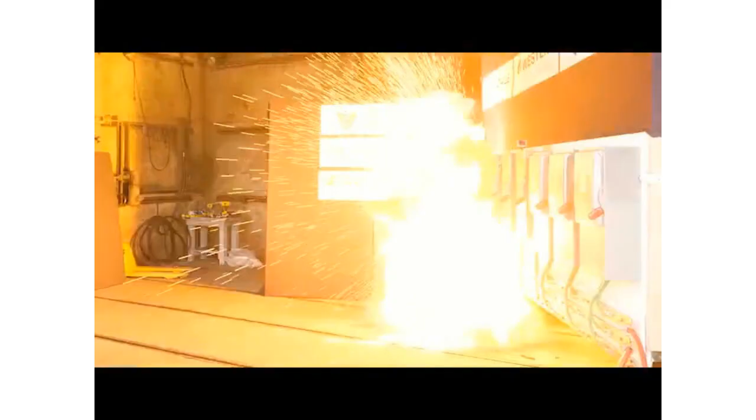Right? So it's not just supposed to not ignite and continue to burn and save your life. It's also supposed to insulate you against the thermal hazard so that you're not injured at all through it, which, a little bit of an oversimplification, is pretty much what an arc rating is about. So there are 2 goals for the clothing. And we're going to take a look at a significant video here of the arc flash. So the whole first video will be arc flash related.

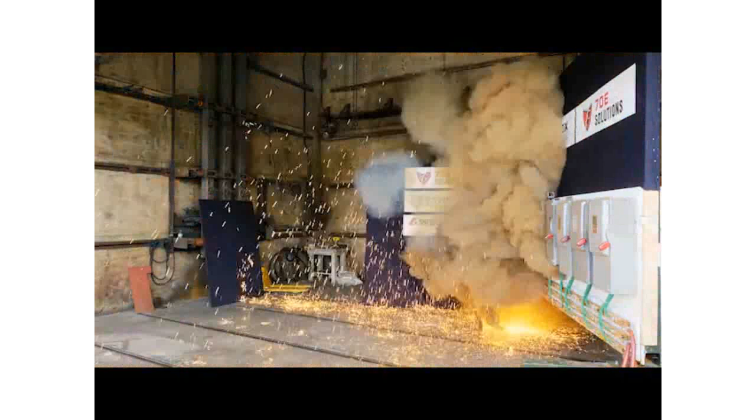So you can see the danger here. So good arc-rated clothing, no fire. Flammable clothing, you're wearing. This is not rocket science, folks, is it? Let's see them at the same. In one case, not only are you not on fire, but the clothing's insulated you from the hazard. You're not predicted to get a second-degree burn through it. And in the other case, you're a fireball. And you'll notice that fire is from the knees up.

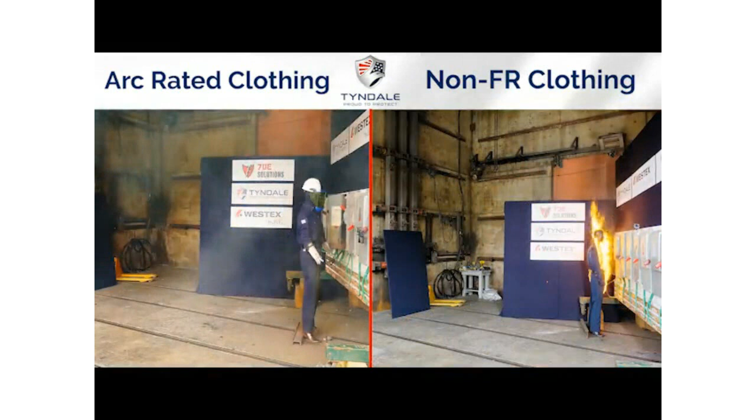What about inherent versus treated? When people look at clothing, they often will think that they should specify one over the other. These are both arc-rated clothing, but one fabric is inherent and the other is treated. So part of the point of the video here is to show you that a lot of the stuff that's done in sales and marketing in this business isn't necessarily what you're being led to believe. There's a close-up of the inherent, and it doesn't have a hole in it. It's not on fire. There's a close-up of the treated. Same thing. They both char instead of burning.

What about ATPV and EBT? ATPV and EBT is another area where you are sometimes misled into believing there's a significant difference, but as you can see here, they both perform the same. Same thing again in slow motion. Both fabrics do what they're supposed to do. They don't ignite. They don't have massive shrinkage. You don't get burned through them. And despite some of the sales and marketing that's out there, you can see they perform equally well. We'll come back to all of this stuff later.

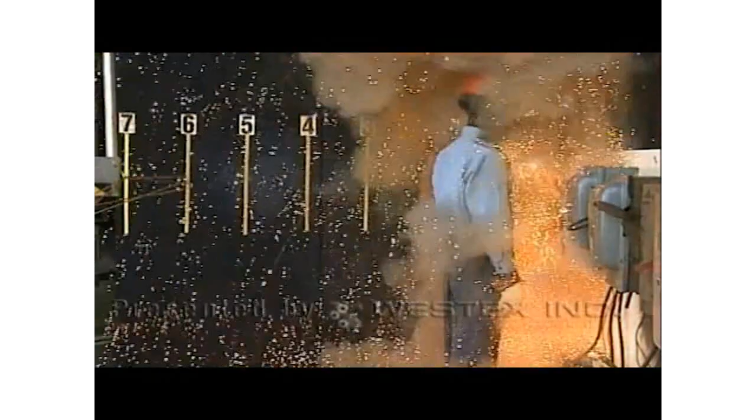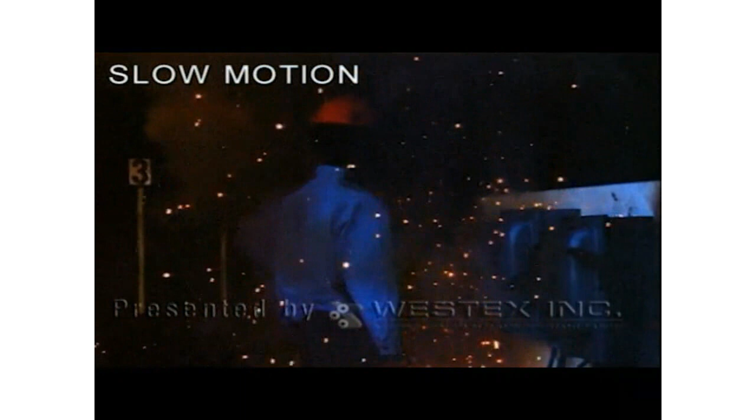What about after a whole bunch of launderings? Doesn't that treated stuff wash out? And again, we'll cover it again in a little bit, but let's take a look in an arc at something that's been laundered 100 times. So it's nearing the end of its service life, not based on launderings, but based on what kind of shape it's in color-wise. Super slow motion. You can see it's a massive arc. It wraps all the way around the garment. Metal going everywhere, but it doesn't ignite. It doesn't shrink. It doesn't have massive holes in it. It doesn't melt. It's done its job, even though it's 4+ years old, 100 industrial launderings. So again, the whole inherent and treated thing, which we'll come back to.

What about logos and emblems? We get questions all the time. Can you use non-flame resistant logos and emblems in arc flash and flash fire? And if so, what happens? So you see an arc on your left and a non-flame resistant logos. So it's massive amounts, given that it's a giant emblem layer. It's not a little chest emblem, right? Massive amounts of non-flame resistant logo, and it's fine. So the standards have specific amounts that you can have, but the truth is that that aside, the stuff does what it's supposed to do. Okay, so that's one video.

Let's talk about some of the details here. Flame resistant versus arc rated. FR, we probably are all familiar with the term. AR may confuse some people. In the last 4 or 5 years, the term arc rated has been out there a lot. And the question we get a lot is, I'm in my arc rated gear, but I'm going to work at a site where they require flame resistant clothing. Let's say it's inside the fence at a chemical facility or refinery. Can I wear my arc rated clothing?

Yes. All arc rated clothing is flame resistant. It has to be flame resistant just to get in the arc rating test. However, not all flame resistant fabrics have been arc rated. So all arc rated gear is FR, but not all FR gear is AR, if that makes any sense. There are people, for instance, for welders, it's flame resistant, but why would they submit it for arc rating? It's not intended for that end use. So that's the difference between FR and AR.

So why do we need this stuff? I touched on it earlier. I'll come back to it. This stuff is the difference between life and death in the same way that a seatbelt is. You don't plan to be in an accident any more than you plan to be in an arc or a flash fire.

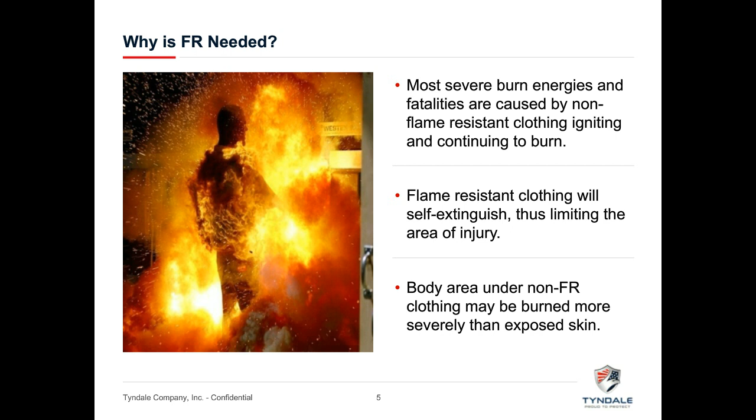So the injuries that result, not just to the skin, but also to the lungs, are catastrophic relative to what they would have been if you weren't wearing any clothing, or obviously if you were wearing arc-rated and flame-resistant clothing. So if you'll bear with me for a minute or two, why are we going to discuss medicine? Well, the existence of the FR business, every fiber, every fabric, every garment, every standard, including the ASTM standards around flash fire mannequins and arc ratings, come down to a fact that we'll get to on this slide.

So what are we looking to avoid? We're looking to avoid second-degree burn and worse. First degree is sunburn. It hurts, but it heals. Second degree is blisters. So the skin will regrow, and you typically don't need medical intervention if it's small enough. Most of us have had a blister. Third-degree burn is full-thickness skin death. It won't grow back at that location. You need grafting, which is extraordinarily painful, extraordinarily expensive, and for many people, psychologically devastating. So I think we can agree that third-degree burn is clearly much worse than second-degree.

But what predicts whether you live or die in an arc flash or a flash fire burn? Unfortunately, in that first day or 2 or 3 or even week or 2 or 3, there are two primary things the surgeon has in mind. The age of the victim, the older you are, the less likely you are to survive the same injury, and the TBSA, or total body surface area, that receives second or third degree burn.

Well, wait a minute. Second or third? How can they be the same for predicting fatality if they're clearly very different injuries, as we just looked at, right? What does second and third degree burn have in common that makes them the same for predicting fatality in those first few days or weeks in a hospital? The answer to that question is what drives the entire existence of the FR fiber, fabric, and garment business, and essentially every standard written about it, arc ratings and flash fire ratings included. So what does second and third degree burn have in common that makes them the same for predicting fatality?

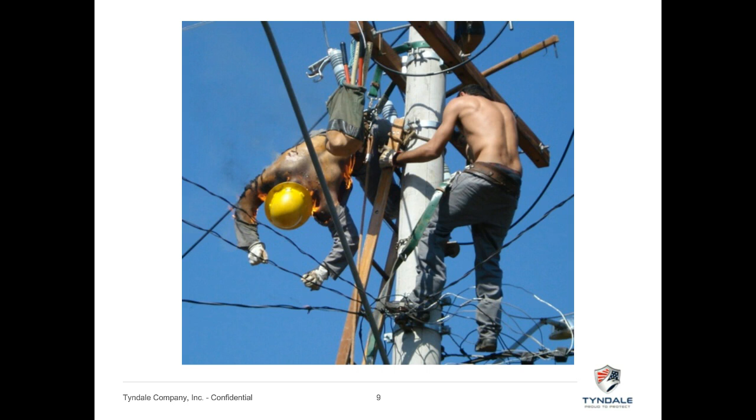So what does it look like? Unfortunately, this is what that looks like. This is third-degree burn waist up. If you know much about burns, you'll know that with third-degree burn, there's something they call the golden hour. It doesn't necessarily hurt at first because your system is overwhelmed. So he had time to phone his wife and say, meet me at the hospital, and apologize to his coworkers.

And those were essentially the last words he ever spoke because he was intubated and put into a chemically induced coma when he arrived at the burn center, and he lived, I believe, 8 days. This is real. It happens all the time. It does not need to. You are literally better off naked than you are wearing fuel if you're going to insist on working energized.

So how do we prevent that moving forward? Arc ratings are what tell us how good the stuff is at preventing those second-degree burns through the fabric. There's two ways to get an arc rating. You may or may not be aware, and without boring you with too much science, there's some sales and marketing done around this, as we talked about earlier. There's ATPV, arc thermal performance value, and EBT, or energy to break open threshold.

A garment may just say arc rating, Cat 2, 8 cals, whatever it is. Or it may specify the type of arc rating. There are 2 types. Is there a difference? Yes and no. If you read those words, they're fancy scientific words. They're a way of measuring insulation. You get one number, typically the higher the better. That's the arc rating for the shirt, let's say 9 calories.

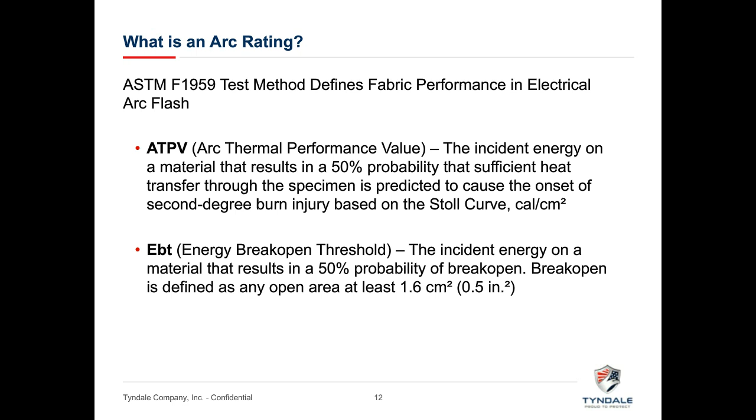This is a picture of a single arc rating report. You do 7 arcs with 3 pieces of fabric exposed to each arc, which gives you 21 pieces of data. Those 21 data points are represented by red dots on this graph. It's kind of a pass-fail deal. If the red dots are on the bottom, there was no second-degree burn or hole. If those red dots are at the top, there was a second-degree burn or hole. So you want dots on the bottom.

And if you look at that graph, you'll see that above 12.5 calories, there's always a second-degree burn. All the dots are on the top axis. If you look at the top axis, below 12 calories on your left, there's no dots. They're on the bottom. So what's that tell you? Above 12 and change, you always got a second-degree burn or a hole. And below 12, you never did.

It's a good test. The computer averages that data with the black line. If you look at your left axis, 50% probability, you come to the black line, you drop down to the bottom axis, 12.4 calories. That becomes your arc rating for that fabric and everything ever made from it. So it's a good test. It tells you how much energy that fabric can block before you're going to get a hole in it or a burn through it, neither one of which is good.

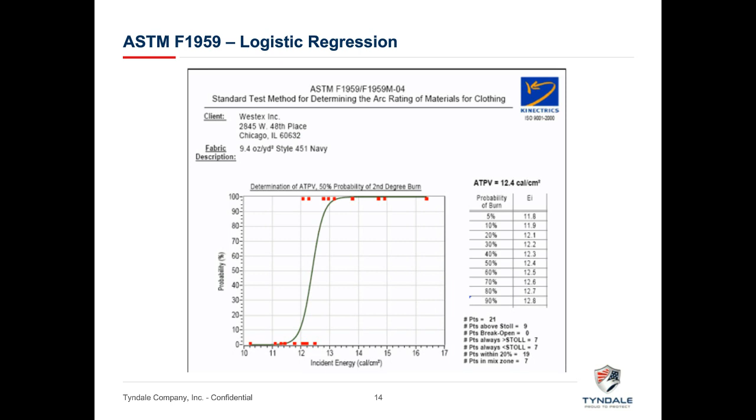The one on the right, the EBT, you got a little hole in the fabric before you got a burn through it. Well, we don't want a burn for obvious reasons, and we don't want a hole for obvious reasons. So they fail the same test in different ways. But that's the only difference. So what are the similarities and the differences all racked up here?

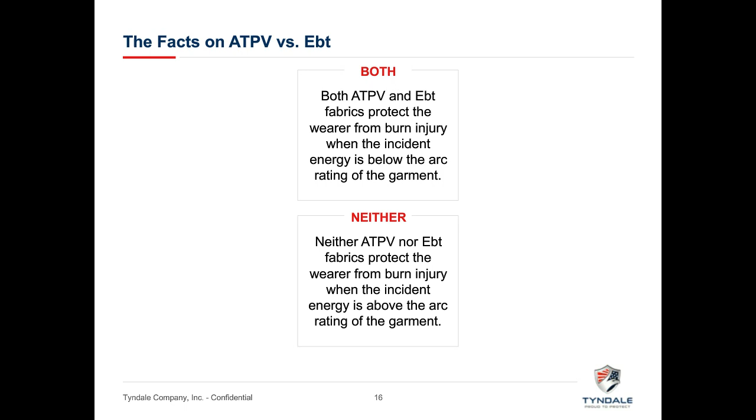Both ATPV and EBT fabrics protect you from burn injury through that fabric below the arc rating of the garment. Neither one of them protects you above the arc rating of the garment, so far there's no difference. ATPV fabrics allow a burn through them before they allow a hole in them. EBT fabrics allow a hole in them before they allow a burn through them. So that's the difference. Neither protects you above the arc rating, both protect you below it. The difference is how they fail, either a burn through it or a hole in it.

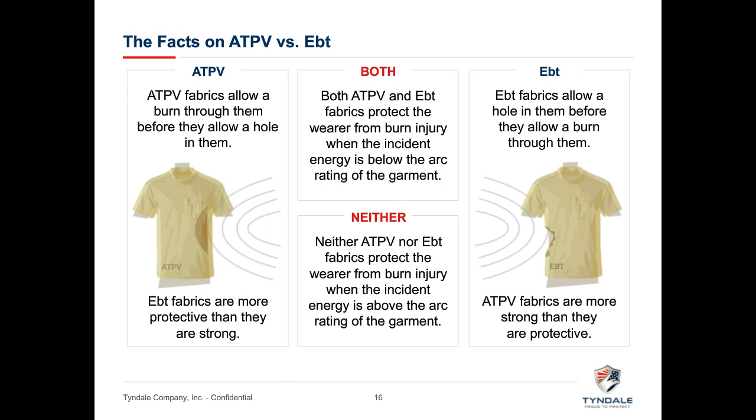And so a simple way to look at it would be EBT fabrics are more protective than they are strong, and ATPV fabrics are stronger than they are protective. But either way, below the arc rating of the garment, you're good. Equally protective. So moving on to flash fire, different hazard entirely, but most of us have both of these hazards whether we realize it or not.

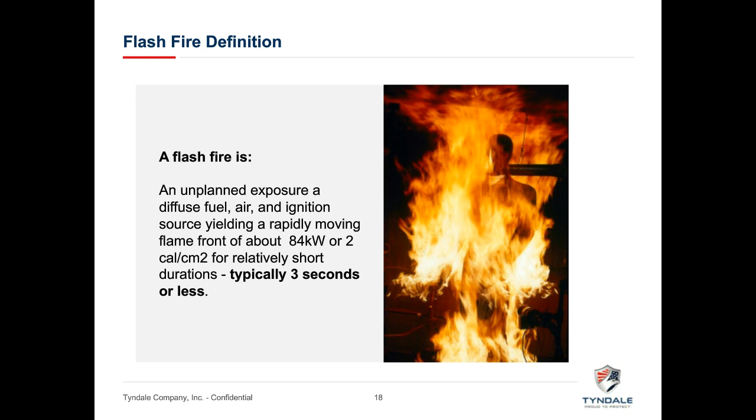What's a flash fire versus a fire? A fire is fuel unlimited in a sense. A building ignites or a forest ignites. A flash fire is fuel limited. It's an unplanned, accidental exposure to a brief directional event. If you have a gas leak, if you have combustible dust in the air, whatever it happens to be, and it ignites and the flame front moves rapidly through a diffuse fuel, by definition, you will have a very brief event. So let's look at a longer video this time with a bunch of flash fire hazards.

A lot of this stuff, by the way, this is at Texas A&M Brayton Fire Field. It's Disneyland for guys like me. We intentionally release massive amounts of propane outdoors in all kinds of conditions. We put mannequins in harm's way, and we see what happens. It's tremendous. So here you have propane.

It's going to ignite on your left. It's going to flash back to your right, and you see that the total duration was 2 seconds to traverse that 60 feet. In slow motion, you'll see it again. So it may have taken 2 seconds for that flash fire to move, but any single place a worker might be standing in it, it doesn't even last that long, does it? So this is why secondary protective apparel, single layer clothing, can protect us against these hazards.

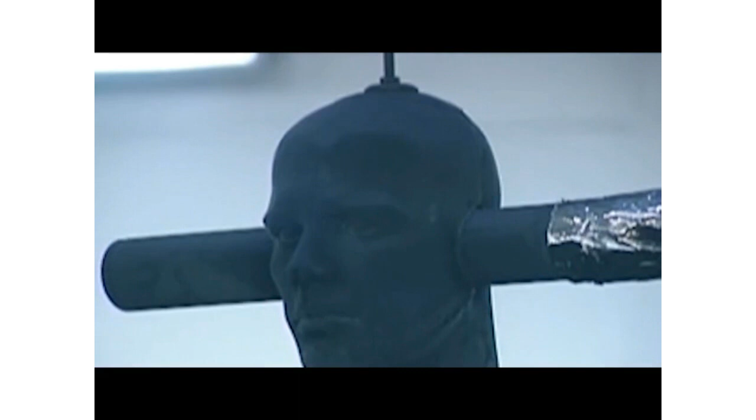What about the official test, which is called the mannequin test by a lot of folks? Pardon that sound there. The mannequin's got at least 100 thermocouples to measure heat transfer through the fabric. The little circles there on the mannequin are the thermocouples. And the torches surround that mannequin. It's completely engulfed in a fire for 3 seconds.

So here's pictures. Who would you rather be? This is not complicated. You passed my test today if you can tell me which one's flame resistant. Anybody think Stop, Drop, and Roll would put that out, by the way?

It's too aggressive. The second-degree burn occurs in less than a second. So there's high-quality FR clothing in that test, and it goes just fine. But what about in the real world? So that fire was on very briefly on that mannequin. You can see in slow motion the result.

You can see the propane being disappeared, if you will, by the fire. The fire is sort of hard to see, but you can tell by the fuel going away, and then a column of fire on top of it being blown down onto the mannequin. And because it's good quality stuff, despite the double hit, it's done what it's supposed to do. This stuff works, even in ridiculously severe circumstances.

Side by side, FR and non-FR, by the way, propane is good. You can clearly see what happens with flame-resistant versus flammable clothing. Not a good situation. This is a better look at it, a little bit slower. In the interest of time, in an hour-long video, we're showing you lots of little clips, but we'll let this one run.

So here comes the propane, shoulder to shoulder in this video, so they're in the same hazard. There's your fire, and the mannequin on your left is fine, and the mannequin on your right, well, now we've seen a reverse view, so we'll switch that, but as soon as the fire's off it, you can see that one mannequin's completely engulfed in flames and the other's not.

This is a GoPro behind the visor, which is pretty cool. We run a lot of GoPros that way. But anyway, not rocket science. It doesn't take much energy at all to ignite flammable clothing, whether it's 100% cotton or not, in these hazards. So same thing as we did in arc.

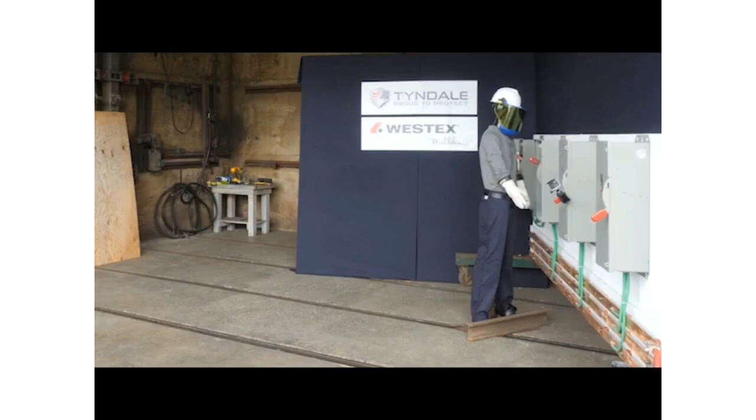So what about flash fire versus fire? We talked a little bit about this. Fuel limited versus fuel fed. If you have a long duration fire, if you have an entrapment or a situation where it's a flash but you're stuck next to the blowing gas, at some point the secondary protective apparel is not enough. Independent of what it'll do for your skin, you've got questions about respiratory protection or your face or your hands, which may not otherwise be covered by these products and the 2112 standard, right?

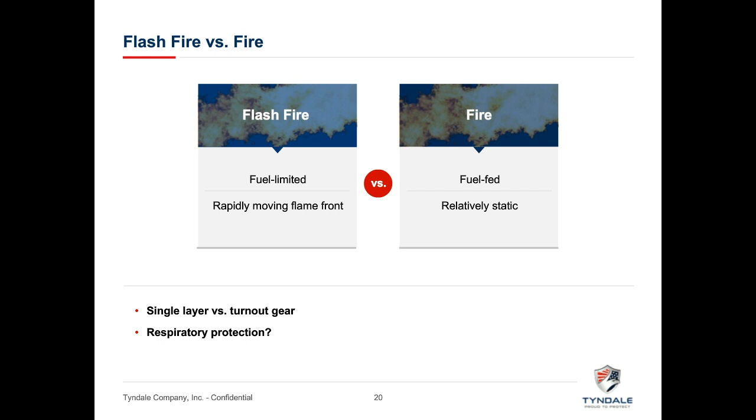And we're a big believer here at Tyndale. I personally and the Tyndale company are big, big believers in let's get it outside the lab when we can and go see what it does in real life in fire and arc. What can we learn? What can we teach? How can we improve things? It's absolutely vital in our view.

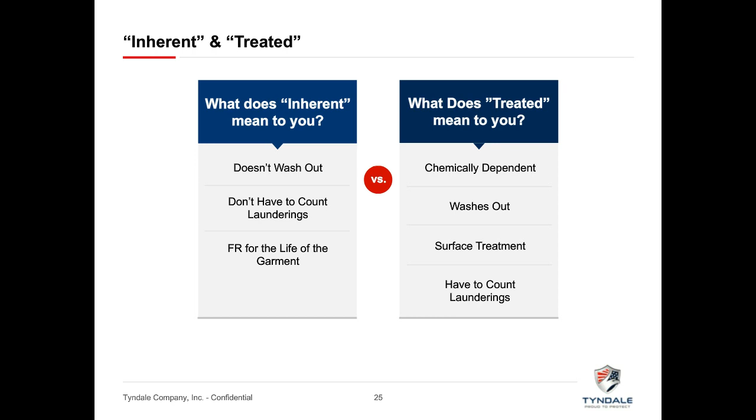But the fact is, and this is inherent and treated in arc flash and inherent and treated in flash fire, right? They look the same. They perform the same. The truth about it is that all arc-rated and flame-resistant fibers and fabrics in common use in our country today are engineered by people using chemistry. In that sense, they are all chemically dependent.

One of the definitions of inherent is by its very nature, right? There's one naturally occurring FR fiber most people have ever heard of, and that's asbestos. If you'd like to wear that, we're not going to sell that to you. But all kidding aside, everything you're familiar with, other than asbestos and fiberglass, all the FR fibers and fabrics that we use commonly in this country today are engineered by human beings using chemistry. That's a fact.

The opinion, I would argue that what matters to the end user who's wearing it or the purchasing people who are specifying it, purchasing or buying it, it isn't how the engineering's done that matters, is it? It's how well the engineering's done, right? So that whether you get that garment out of your drawer or your closet 6 days later, 6 weeks later, 6 months later, 6 years later, it is still flame resistant. That's what matters, not necessarily how that engineering is accomplished. And the truth is that all of the quality fabrics made by proven manufacturers are FR for the life of the garment.

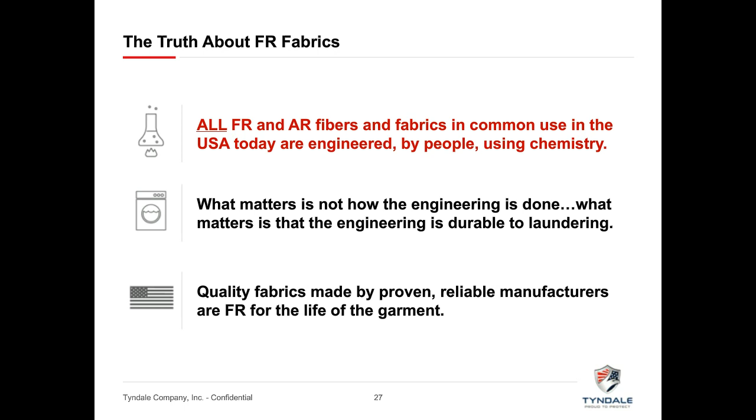There are companies out there who will sell you anything that complies or anything that you ask for. There are companies out there that won't. And all the good stuff, and it's not all good stuff, but all the good stuff is FR for the life of the garment, guaranteed, including a number of treated vendors, 3 of which are United States-based and 2 of which are not. That's new in the last several years, but there are at least 5 quality vendors out there of treated products that are good for the life of the garment.

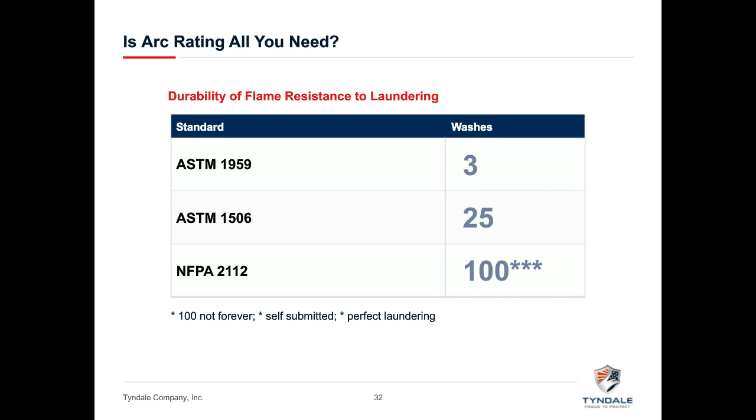Is this 2112 compliant? Yes. Okay, so what? Yes, at what body burn percentage? Here's my ARC ratings. Are all Cat 2s the same? No, and now you know why. Some stuff doesn't last. The FR doesn't last, and it's gotten even worse recently. So there was always everything you've just looked at since the standards have existed the last 20 years or so.

But NFPA 70E, it may not apply to you, but the industrial electrician market in the United States is significantly larger than the other markets combined, oil and gas, utilities, molten metal. And so almost everyone builds their garments to be compliant for the 70E market, whether or not you personally buy it. You should be aware that recently in their last revision, 70E removed all mandatory references to third-party standards. I'll say that again. They removed all mandatory references to third-party standards.

They had some sort of stylistic reasons for doing that, but the ARC rating standard is ASTM, not NFPA. The 1506 standard that we just looked at is ASTM, not NFPA. Those are no longer required by 70E. So in theory, it is entirely possible now for anybody to bring you anything and make any claim they want. I self-certify that this fabric I made in my garage is cool.

I'm overstating a little to try and be funny, but it's a subject that makes me a little bit upset because there was already a lot of potential out there for bad stuff to happen, as you saw with the counterfeit and the UL counterfeiting and so forth. But now it's literally possible because the mandatory references have been removed. So be careful.

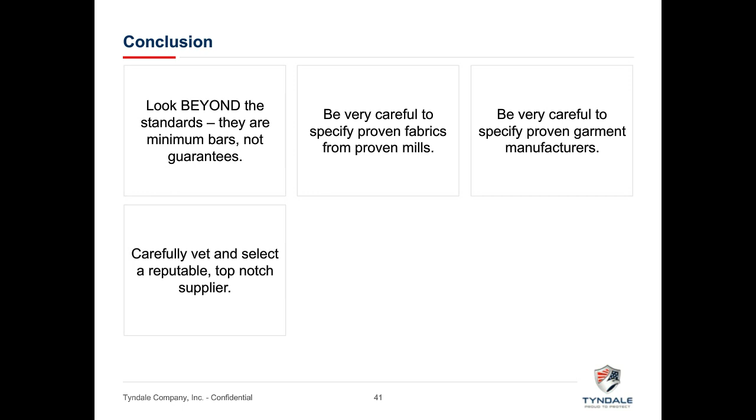So it's more important than ever to carefully find somebody in this business who you trust and who you know has your people's best interest at heart. People over profit. Nobody's in business for charity, but there's a higher fealty, a higher loyalty, or there sure as it should be, to your people, and the rest of the business considerations should be secondary, in my opinion. And then, observe the program, enforce your rules, or who knows what will happen.

So I like to call it a safari guide because I'm an animal guy, but to oversimplify all that, if you're going to go climb Mount Everest tomorrow or jump out of an airplane and you've never done that, or go shark diving, or go on a walking safari in Africa, are you just going to go do it on your own? Are you going to find a guy or a gal in your company who read a book and says, I read the book, let's go? Or are you going to find the best, most qualified guide you can and pay whatever it takes to have that level of quality and trust them to have your back? It's literally your life, or in this case, potentially the lives of your people on the line, and I would argue that it's a fairly similar thing here.

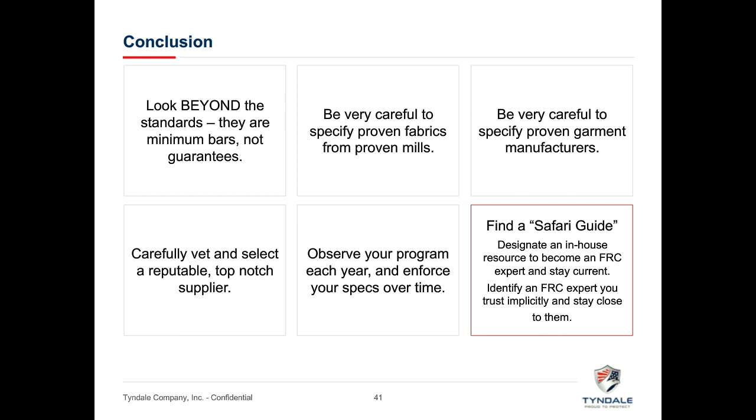It's choice. If you've ever been down the cereal aisle or the beer aisle, you'll know Americans like choice. You could be given the most soft, comfortable, breathable, lightweight fabric in history. But if you're told that all day, every day, you're going to wear one weight of one size, of one style, of one color, of one fabric, top and bottom for the rest of your life, you're going to come to hate it. People want choice. So that's number one, and it's got nothing to do with fabric issues.

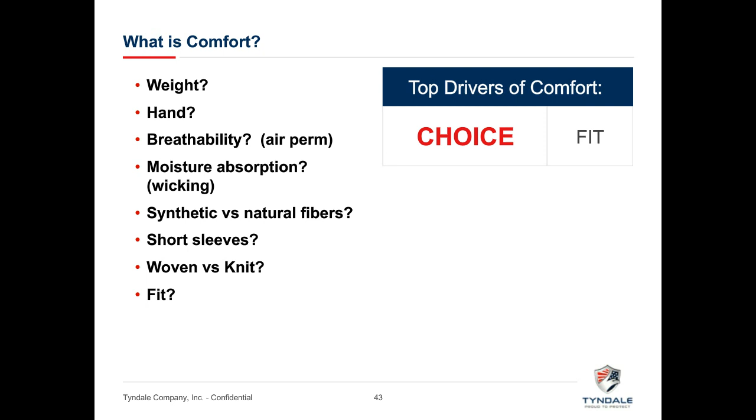Number two is fit. I don't care what it's made of. We all know the Johnnie Cochran rhyme, but if it doesn't fit, it's not comfortable. We still haven't gotten to fabric properties. It's only after choice and fit do we come to properties like weight and hand and comfort. And even then, what an awful lot of people will choose is the style they like, or the brand they like, or the color they like.

Think about the last time you went into a store to buy clothing in your personal life. Did you go right up to the sales clerk and say, show me the lightest weight stuff you've got? No. What do we do? We walk over to the brand display that we're most partial to, or we walk over to the style that we're most partial to. Maybe it's flannel, maybe it's denim, maybe it's the outdoorsy tech fabric look, maybe it's quarter zips. And only then do you put your hand on the stuff and feel it and try it on. You're selecting brand, style, color first.

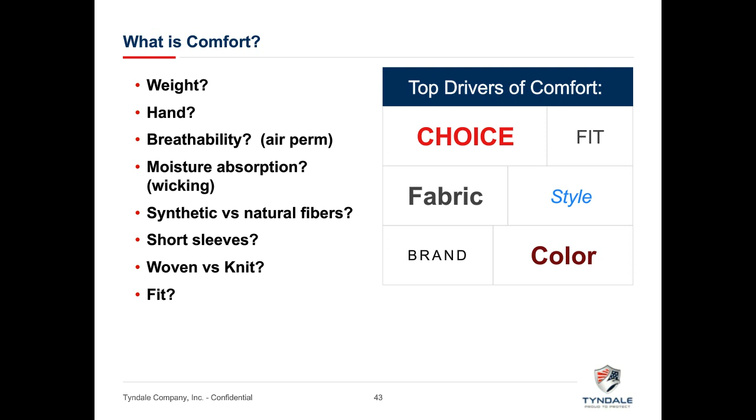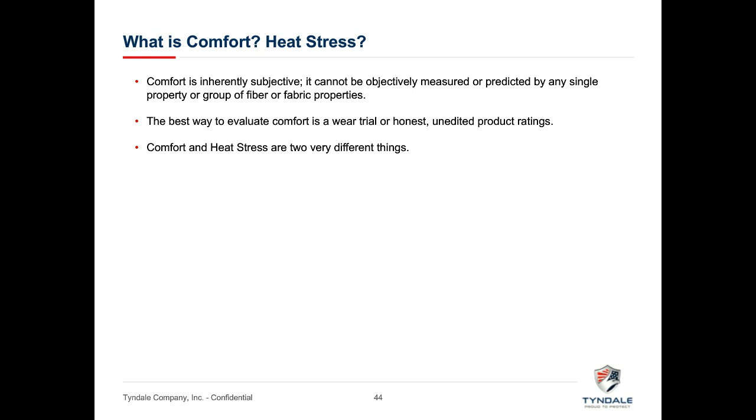All right, what about heat stress? Does this stuff cause heat stress? Am I introducing as many problems as I'm saving people from? No, we're not. Comfort is inherently subjective and can't be measured, but heat stress can. Heat stress and comfort are not the same thing. Heat stress is really different. No single layer of breathable apparel is a significant contributor to heat stress. That's according to the CDC, NIOSH, in other words, OSHA, the federal government agencies that look at this. I'll say that again.

No single layer breathable apparel is a significant contributor to heat stress. So long sleeve or short sleeve, doesn't matter. Arc rated or flame resistant, doesn't matter. Relatively light or relatively heavier, doesn't matter. They're not significant contributors to heat stress. Long sleeves, folks, are actually better.

The sun is a radiant heat load. Long sleeves keep that radiant heat load off part of your body. If you've ever been to the Middle East, do you see people running around in short sleeves? You do not. So what does cause heat stress? How do we dump heat when we need to dump heat? We radiate it. Well, what about if it's hotter out than you can radiate, or you're working physically and you're building up metabolic heat in your body? Well, now you sweat, right?

So it shouldn't surprise you to know that what causes heat stress is poor hydration. If you show up to work well hydrated and you stay well hydrated, you are extremely unlikely to become heat stressed. The next thing you can do is take a break. Is that 5 minutes an hour? Is it 10 minutes an hour? Is it 5 minutes every 15 minutes? It depends on the ambient conditions, your physical condition, and the work you're doing.

But take that break in the shade, out of the sun, and rehydrate with clear liquids. Red Bull does not count. Sorry, I shouldn't have mentioned a brand, but non-caffeinated, non-diuretic liquids. Those are the things that cause heat stress. Also some illnesses and medications.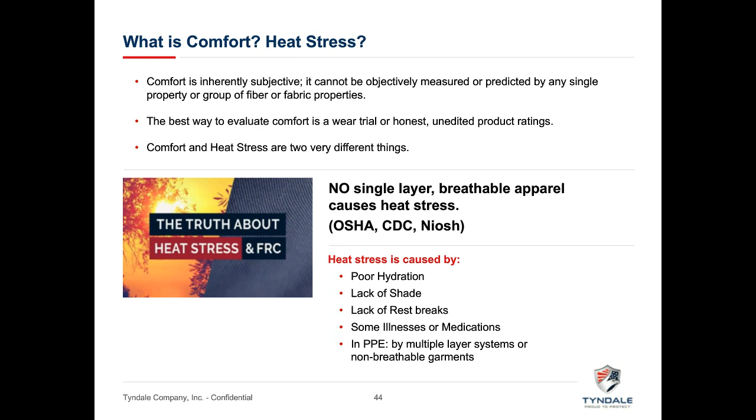Once you have it, do you have to worry about taking care of it? Well, all the quality stuff sold in the United States today is FR for the life of the garment. There's certainly stuff that's not quality, but your top-notch manufacturers, your big four, anything you get from them is going to be FR for the life of the garment. And certainly anything that you get from my company. We will not sell anything that we don't believe in. I don't care if it's compliant. It's got to pass our standards in addition to the compliance standards.

So you can launder them at home. You can dry clean them. You can industrially launder them if you want to. Keep in mind that ILs, that's industrial laundries, don't generally handle knits, and knits are a huge piece of what people think is comfortable. I happen to have a VP from one of the top knit manufacturers sitting in my office watching me do this, and he's nodding his head. Knits are where it's at these days.

The concern is usually bleach and fabric softener. If you read the labeling carefully, it'll say no liquid bleach and no fabric softener. Bleach is prohibited for all garments, so is fabric softener. Fabric softeners tend to be flammable. But the bottom line is almost no one wears white in industrial environments, and almost nobody bleaches colors.

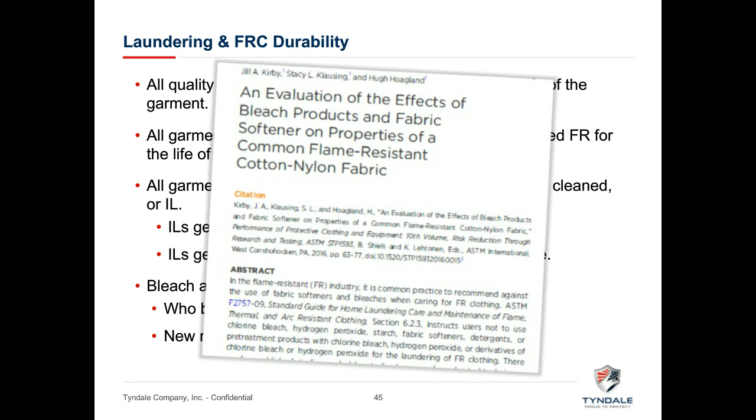And even so, there's excellent research published by ASTM, Hugh Hoagland, if you know that name, as an ASTM paper where he intentionally subjected FR clothing to 50 cycles of bleach with no effect and 50 cycles of fabric softener with no effect. So if you're concerned about that, there is a quick screen grab of the abstract from that report, and you can go and download it. So even what we've all told everybody for 15, 20, 30 years isn't nearly the concern that we all thought it was for a very long time. So once you've got the stuff, if you take care of it, it'll take care of you.

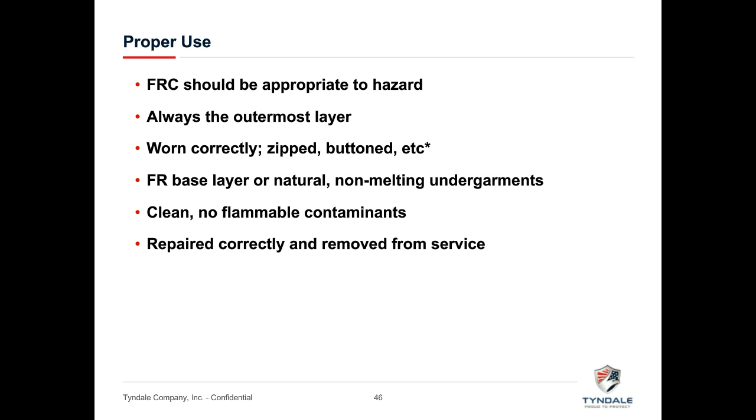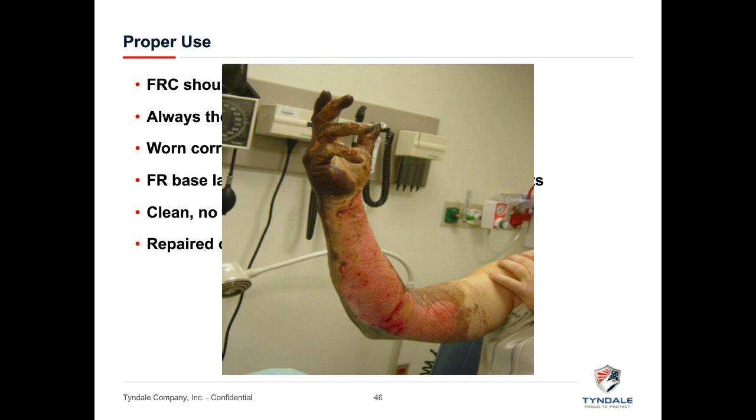So anyhow, last thing here, I'll leave you with this and we'll take questions. I said, again, wanting to, I don't know why this is not playing.